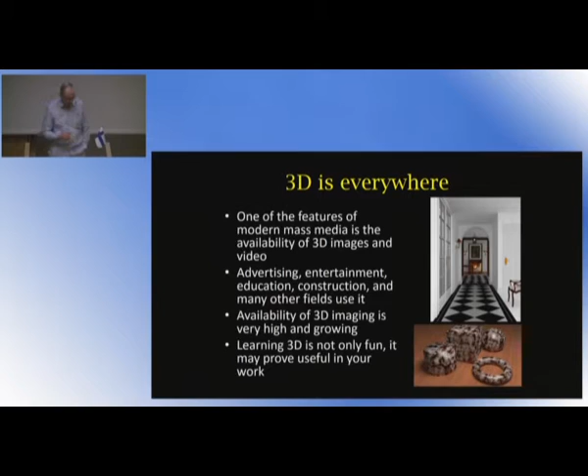The availability of 3D images is growing, and the availability of software with which you can make 3D is growing. So to make something you need a 3D environment, and if you want to go with the Autodesk products, currently you can get them for free for the duration of your studies through Haaga-Helia. But after that, it's going to cost you 1,600 euros per seat per year. Of course, if you are working someplace, it's not a big deal, but for your personal use, it's going to be pretty heavy. The same goes for Maya, Cinema 4D, and Lightwave.

Cinema 4D, by the way, is used mostly in media and advertising because it's very fast, very easy to create all kinds of 3D things there. So the basic problem is that they all cost money, unless you happen to have a student license. Well, why pay when you don't have to?

Because Blender is free, it's open source, and it's just as powerful as all the others. You can go to Blender.org now, get it downloaded, and start right away. There's hundreds of thousands of people in Blender Space, which is the virtual environment where Blender people go. They're called Blender heads, and it's a fun place compared to meatspace, which is where we now are.

It used to be a competitive package for Autodesk, but then they found that they really can't compete - Autodesk is too big. So they went to the web and asked for some money. They got $100,000 in 7 weeks, and then they gave the software to the Blender organization, or the foundation actually. That's why we have a foundation that runs the development.

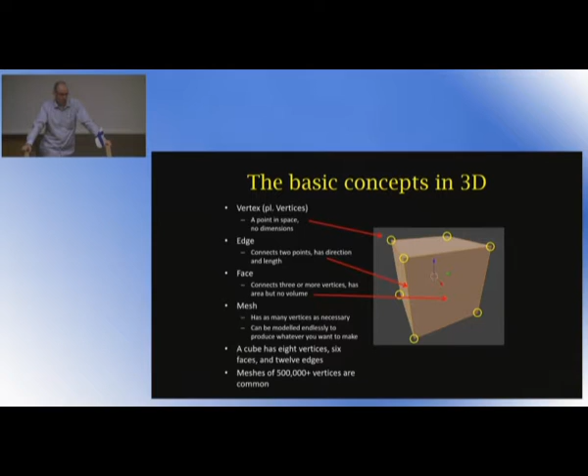You can download the models and meshes and start working on this if you want to, because it's all open source. But I'll show you a video that shows a cube, deletes almost everything so just one vertex is left, and then gives you the rest of the cube back from there, because you can do this very easily.

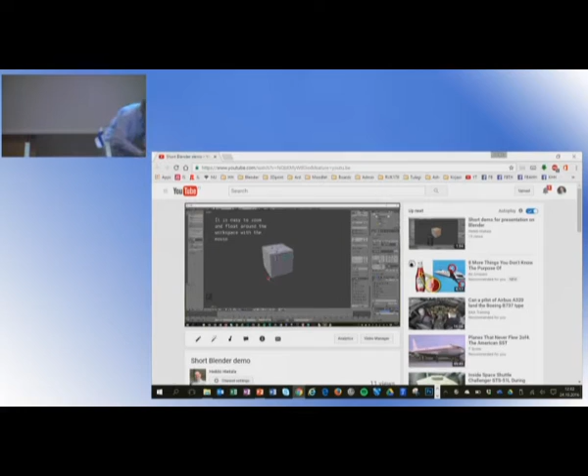So this is the Blender workspace. When you open Blender, you always get this. There's a few standard items in it. Why can't I see that? No, it should show. Okay, let's go back and start from here.

Okay, now it works. So you have a lamp, you have a camera, and you have a basic cube mesh, and you also have a grid that you cannot touch, but it's there for your placement of things, for example.

When you press the scroll button, you can orbit, pan, and move the view, and then you can select this object by right-clicking on it and go into edit mode. Now in edit mode, you can touch any of the vertices or edges, and you can delete any of the edges or faces, whatever you want to do.

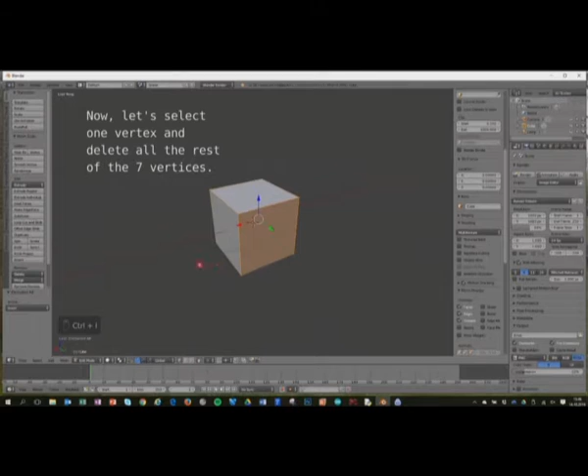So we're going to go back into vertex mode and select one out of the 8 vertices and delete the others. So what you have now is one single point in space that doesn't have anything to it except the location where it is.

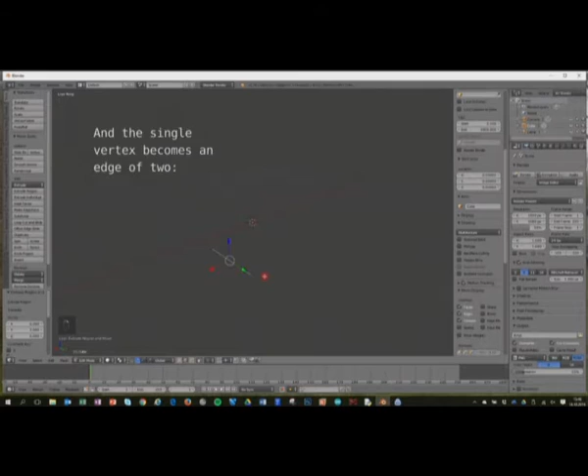And now we will press the E key and extrude. Essentially it makes a copy of that one vertex, and you get 2 vertices, and then you have an edge. Then you can select the edge and extrude along the other axis, and hey presto, you have 4 vertices and a face. Then you can select the face and extrude up, and you have the same cube that you started with. Just 3 moves.

And this is the very basic operation in Blender. All you do is touch the vertices, arrange them in the way you want to have them, move them anywhere you want to have them, and there's nothing to it really.

So the process is always the same. First you identify what you want to make, then you think about the basic shapes that you want to use. There's about 20-25 basic shapes that you can use: the cube, the sphere, actually 2 different spheres, a cone, a circle, a plane, all that kind of stuff.

And after that you make the mesh, and then you add materials, and then you add textures, and then you add a scene, lights, whatever you want to have, and then you render the image or the movie. So I'll take you through this case example.

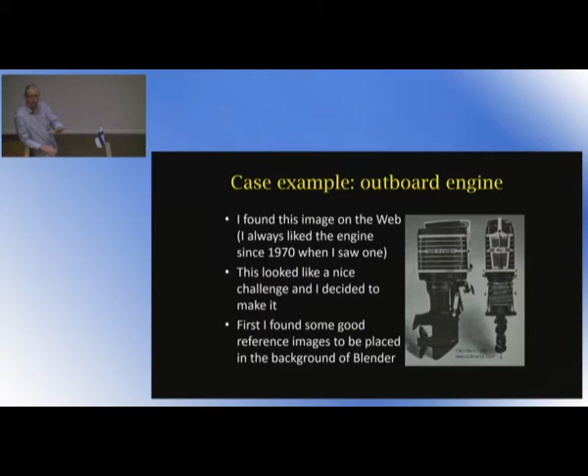So first you have to find some good reference images that you can place on the background in Blender, and then model on top of the pictures. Actually, it's very nice. So the basic shapes in here, the best basic shape is this part here.

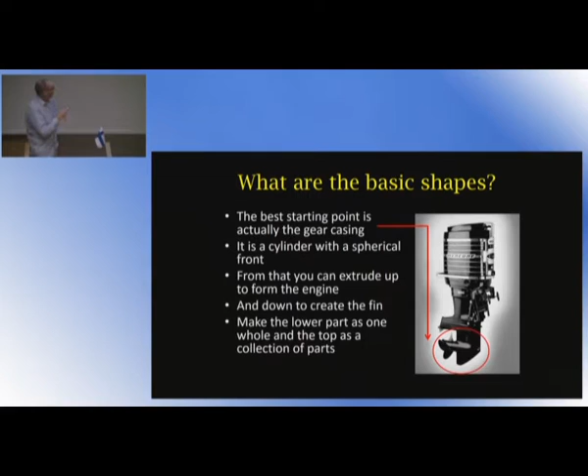This is the gear casing or the gearbox. There's half a sphere in here, and the half a sphere is continued as a cylinder. So I took a sphere, I rotated it 90 degrees, and I deleted the other half. And as you saw with the extrusion, the E key, if you have a circle and you extrude, you get a cylinder. So half a dome here, extruded out as a cylinder.

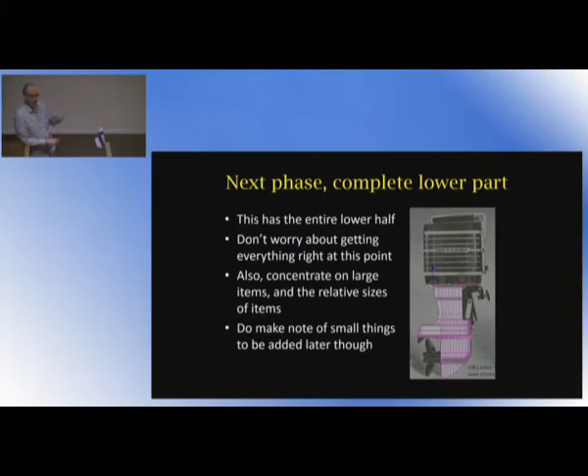Then I took some faces up here and extruded up. Then extrude sideways, up and inwards to get the cavitation plate. The first part is actually something like 3 minutes, and that's the lower half of the engine, all done. All you have to do is look at the picture and extrude and scale, extrude and scale, extrude and scale.

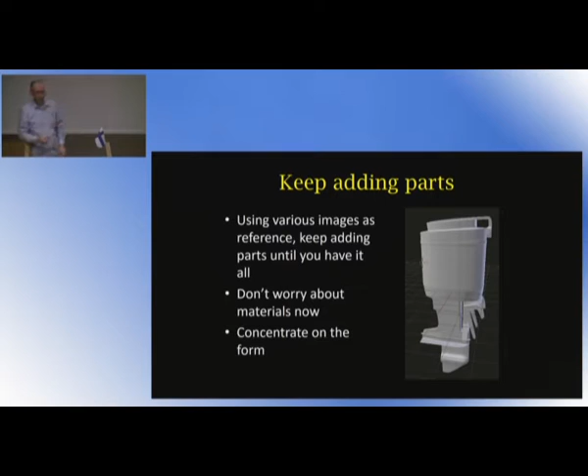And this is the engine when it's done without any materials. It looks pretty boring, but it looks exactly like the image. It's been modeled on top of the image, and it is a very close match to the images that I had. So let's look at the materials.

Most of the engine is actually semi-glossy black. In Blender you can have colors that are glossy or diffuse and matte. If you made it fully glossy black, it would not show at all because it would reflect all the light it gets. And if you make it fully diffuse black, it won't show at all either because it takes in all the light and disappears. So this is about 70% glossy and 30% matte.

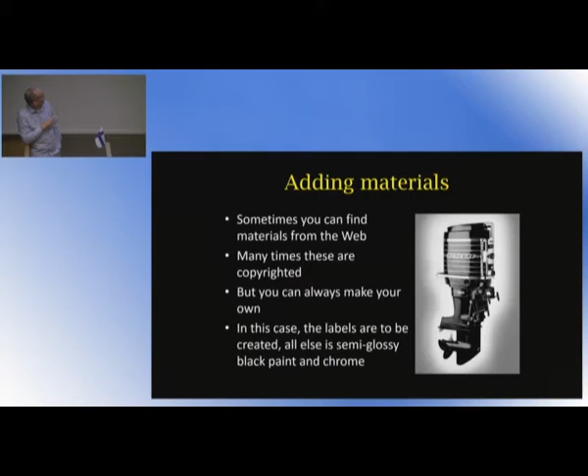Then there's a couple of decals, one here, one there, and one here, and those have to be made by hand. So I went to the web and found this image, and I called the firm that makes those. I said, can I have that in a high resolution picture? And they asked me why. I said, I'm making a 3D model of the engine. And they said, we'll call you back. They never did.

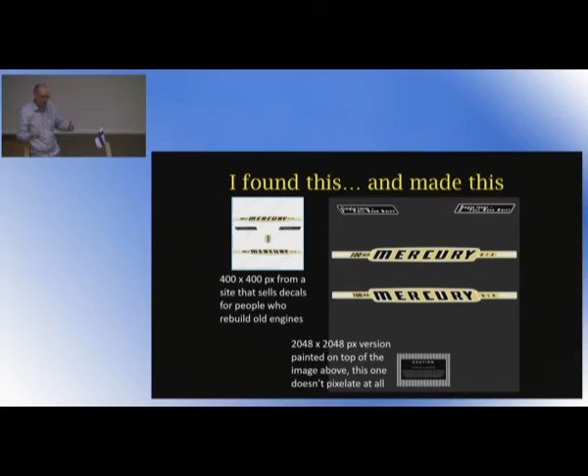So I took the picture and expanded it to 2048, and then I drew on top of that. I found a font that was pretty close to the original, and then I used GIMP to make it nice. Because when using these decals, if you didn't do that, you'd see pixelation all over the place, since everything would have to be stretched to fit the mesh. But with the materials, this becomes this.

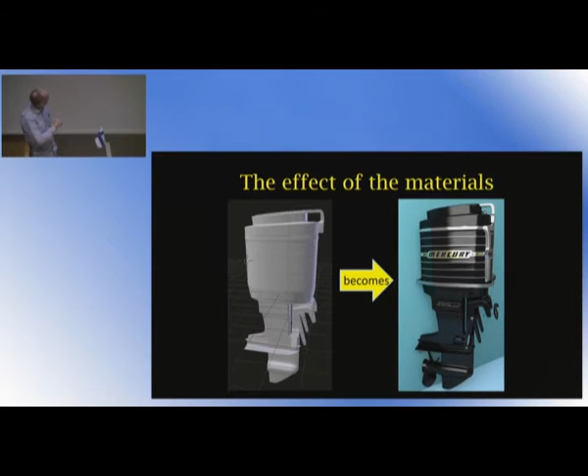So you see we're pretty close to where we wanted to go. All you have to do is identify the place where the decals go - 1, 2, 3, 4, 5 in here - and then just place the decals there, and everything else is just semi-glossy black. Then you have semi-glossy steel and semi-glossy aluminum up here, and it's getting pretty close to what I wanted to have.

But with the big picture, there's no pixelation. You can actually zoom in as close as you want to. The faceplate is made in Excel, because Excel is very good for making grids of things. And in Blender you can tell that if something is black, make it look like it's a few millimeters in, and if it's white, pull it out a little.

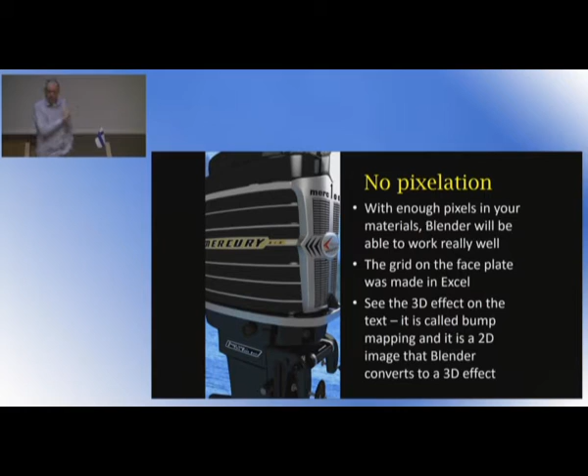That's why you could do that. This is actually a flat plane, but it has this bump map on it, and that gives it the 3D look. So you fake as much as you possibly can. Nobody's going to come and check if this is watertight. It isn't watertight, but it doesn't have to be. It looks nice - that's the point in 3D.

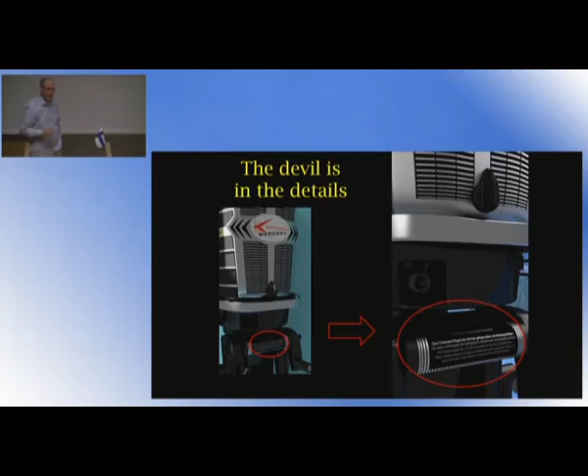But by this time, I was so hungry for more that I wanted to add a scene. In the scene, I wanted to have a boat and a lake and a pier and whatever I wanted to have. This time, I didn't want to make the boat into a very detailed, high-tech type of thing. I wanted to have a boat that looks like a boat. So I found a boat on the web, and then I made a boat that looks close enough to the real boat.

And then we have a modifier called the ocean modifier, where you can say that the wind comes from that direction at 4 meters per second. There are no white caps, but it has been going on for a while, so you have the swells, right? So you just let the animation run until it looks nice, and then you grab the picture.

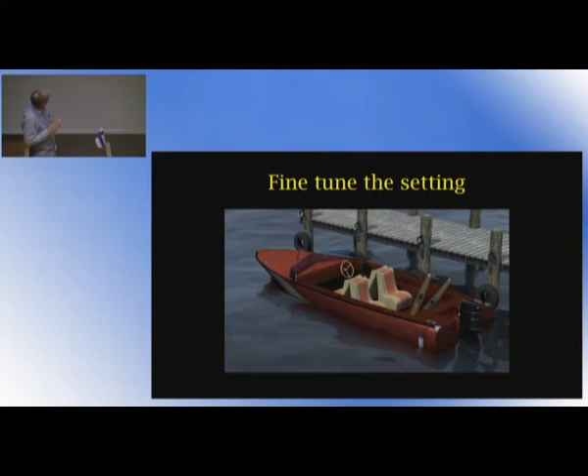Okay, then you fine-tune the setting. You make the water skis, you make the fender, you make the car tires for these thingies. You add these iron rings for the ropes, whatever. Then you make the Acme Cola cans. I didn't want to make it Coke because I don't want to get sued. So it's Acme Ski and Acme Cola. And the boat is Speedster 19.

I showed this picture to a friend of mine from my phone, and he's very big into boats. He was like, I don't know that type. Is that a Marino? I said, no, it's not really a Marino.

But yeah, there's no end to what you can do. Once you get to the scene place, you can just keep going.

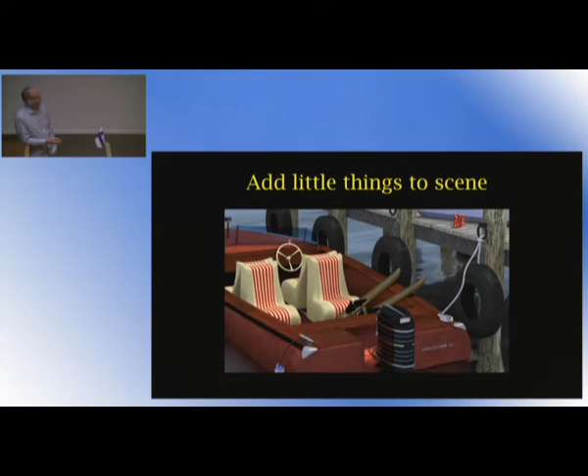So this is the final image I wanted to render, because this one has the sun over there. You can actually tell Blender how your mesh is located, where on Earth it's located, and what time it is, and then it will calculate the location of the sun. So if you wanted to have this in a Florida setting, you could easily make it by setting the sun using the coordinate system.

Okay, so this is the final render I made, but it's not the end of the story.

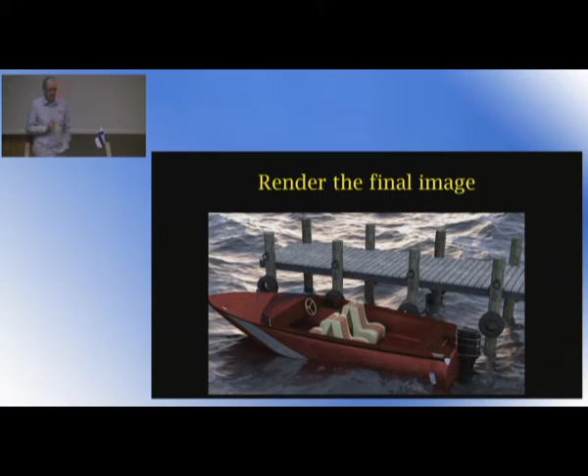Now, of course, because this is a test, like a proof of concept type of thing, they are going all over the place. But if I placed these emitters close to the engine and had the boat here, I could pretty easily simulate how it would look if the boat came from the left and passed you over to the right, throwing these small spheres.

So yeah, now it's animated. If you wanted to make a game out of this somehow, well, the mesh is there. You can start doing whatever you want with it. So this is the fun part of Blender. You're never out of things to do.

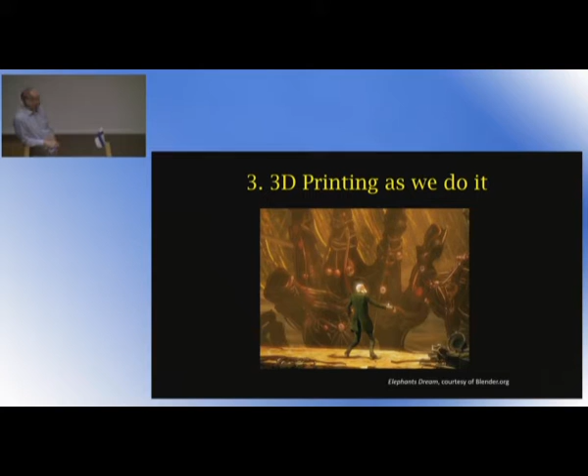This is from Elephants Dream. It's actually a nice movie as well. You should go and see it as well.

So, 3D printing is also known as additive manufacturing, and the difference between the old way and the new way is that you had to guess that this piece of rock has Julius Caesar in it, and then you would have to spend 6 years with the hammer to get this guy out of the rock. Well, I don't have 6 years, and I most definitely don't want to do that. So what I do is I print things. I only add material where I need material.

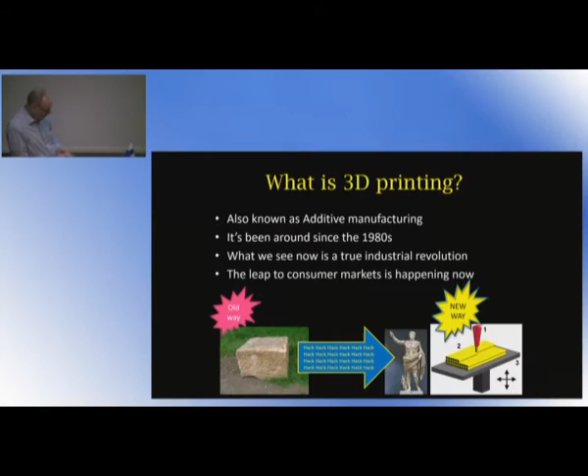So I'm trying to make it sound as easy as 1, 2, 3 because it is actually as easy as 1, 2, 3. Once you understand how to make meshes, once you understand modeling, the moving from modeling to printing is actually a no-brainer, because all you have to do is create your meshes in a certain way so that they are not too big and they don't have angles in excess of 60 degrees from the vertical, or actually 45 degrees from the vertical, because here you need supports.

And here you cannot fake anymore. Your meshes have to be watertight. If they're not, Blender will tell you and you'll spend hours finding the fault.

Once you have the object, you can export to STL file format, check the file for holes, then fire up the printer and use the printer software to actually do the printing. The design can be done in any software, as they all export STL. All you have to consider is the size.

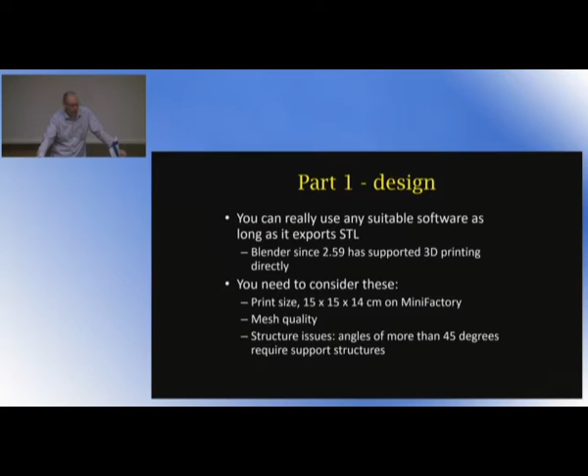My printers are small, 15 by 15 by 14 centimeters, and I have one that does 15 by 23 centimeters. But if things go right, I will have 8 printers by the end of the year, and I will have 24 seats on the printing course. If not, I'll only have 15 seats, so it's going to be a large competition to see who gets in.

The STL file, Blender files don't print. You have to export from Blender into STL. STLs are basically triangles on triangles on triangles. If you think about 3D printing as a whole, you are doing 2D printing many, many times in the same place, and that's how you get the third layer, the third dimension.

So if you were doing a hollow cylinder, you would be printing those triangles, then moving the print head 0.1 or 0.2 millimeters and printing again in the same place, then moving the print head up and printing again. That's why it takes so long.

If you look at the chess table that we have over there, the table itself takes about 16 hours to print, and the two sets of pieces is also 16 hours. So it's 32 hours to make one table. This is not for those who are in a hurry, really.

So the printing, this is the cool part. Let's say you make something that looks nice, and it prints nice on our small printers. That same STL file can be printed into any material available on the planet without any further modification, using any other printer. So Kalevala Koru enables you to send them the STL file of jewelry, for example. They will print you the piece of jewelry you want and charge you the price of the material plus 20%. I've seen some really cool, unique jewelry.

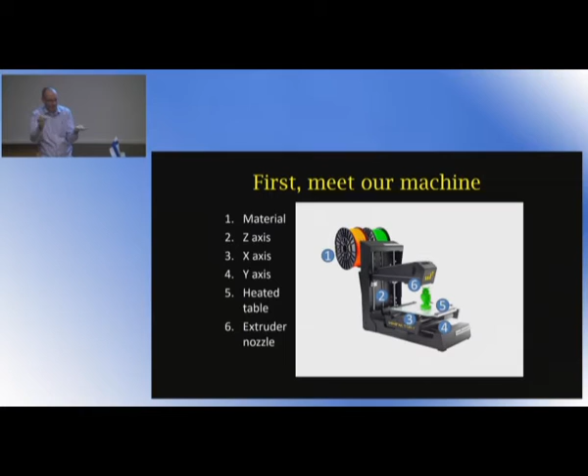So if I wanted to make a keychain from the Blender logo, I would have to find out what is the basic shape to start from. The basic thing to start is a sphere, which you cut, then extrude sideways, up, sideways, down, and then add a face at the bottom. Then this is actually the hardest thing to make, the hole. Holes are harder to make than things that are real.

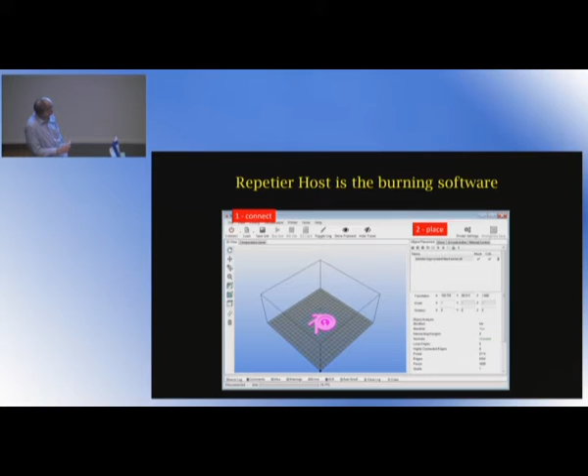You place the thing in here, then you can scale it, rotate it, move it, and check that it's manifold. Manifold here means watertight, and you can check it here. Then you can use the slicer to give you the sliced version, the G code, and check that all of these are in place.

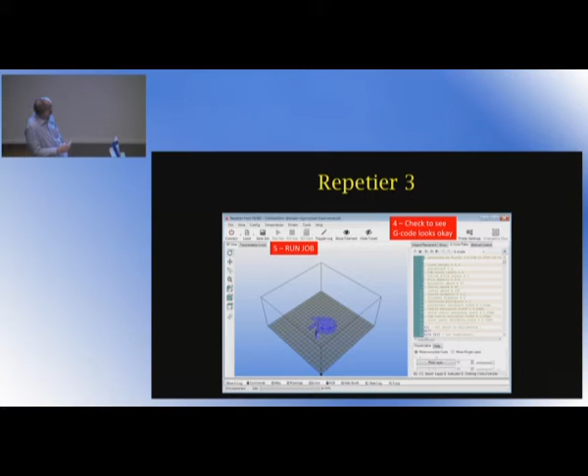And then all you have to do is hit print. This is the G code, by the way — G21 sets units to millimeters. If you were really hardcore, you could actually write the G code yourself and print something from it. But it would be very hard, because even this thing here is going to take 25 minutes, and it's something like 18,000 movements on the table and the print head. So you'd be writing 18,000 lines of code by hand. It would be nice to see if somebody did it.

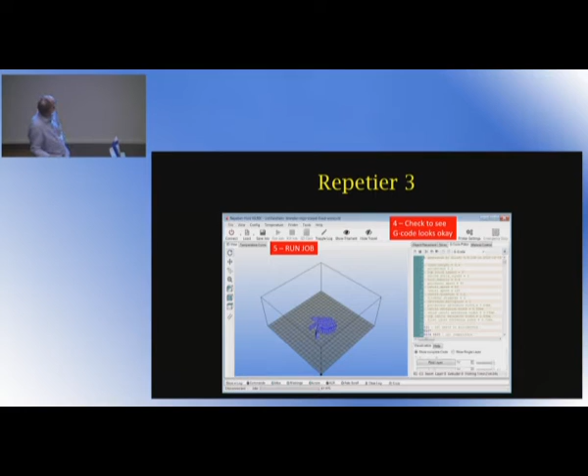And then you hit print, and hey presto, here we go.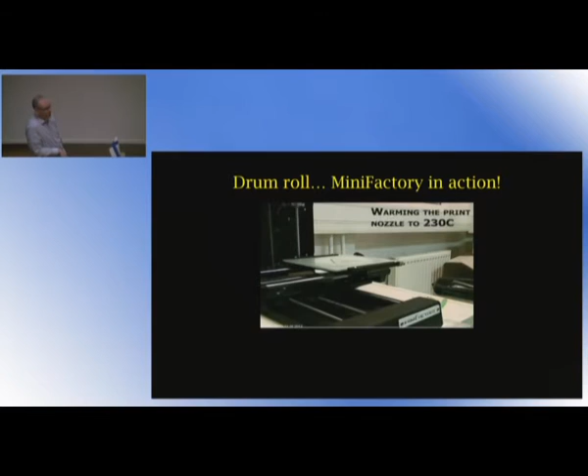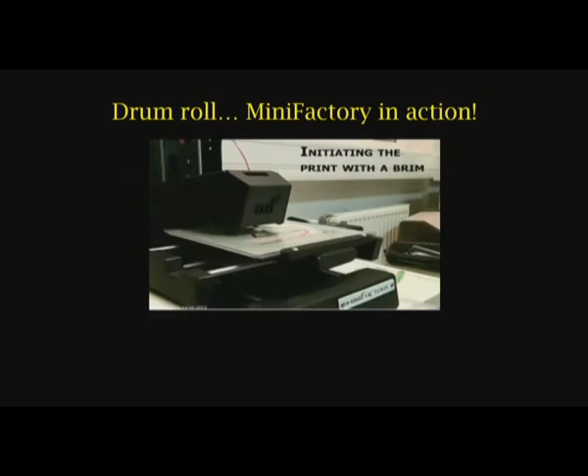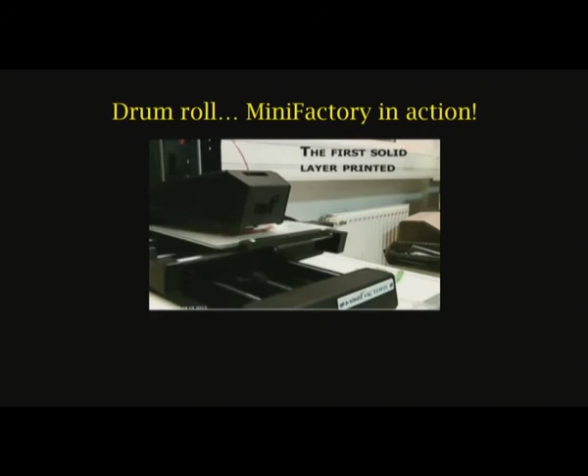First we heat the print bed to about 110 degrees if we are using ABS. Then we heat the print nozzle to 230, 235, 245, and then it goes on. The first thing it does is initiate with the brim, and the brim is there merely to make sure it sticks to the table. Then it makes the first solid layers — three solid layers first — and then it starts to use infill.

Infill is just a way of saving material. Instead of printing solid blocks, it will use 20%, creating a network of lines inside the piece that's 20% of the weight of the actual material if it was solid. But even if you print something like this — yeah, I know, nothing else will happen during the movie —

Even if you printed a solid piece or a 20% infill piece, you cannot break it in your hands if it's a 20% piece. It's so tough.

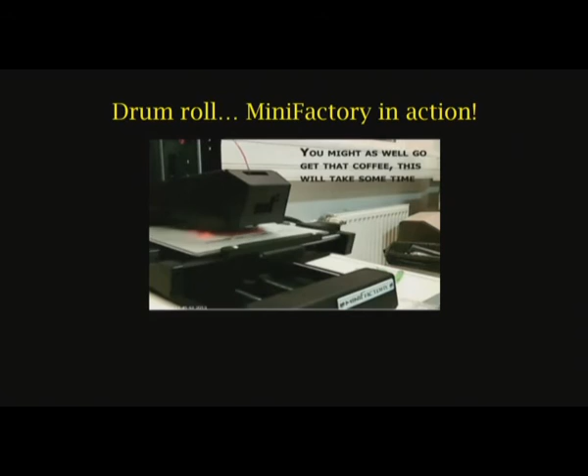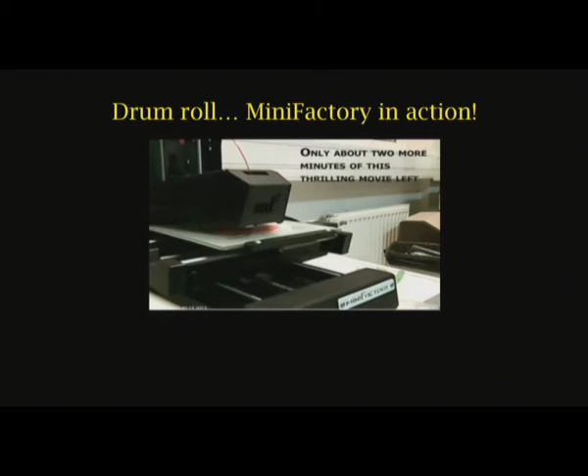It actually has an Arduino in the back. This is actually the project of a guy called Janne Pihlajaniemi at the Seinäjoki Polytechnic. He made this as his thesis, then walked across the street to the government office and said, I have one of these, would you like to give me a government grant so I can start a firm? And they wrote the check right away. Now he's selling about 1,000 a year.

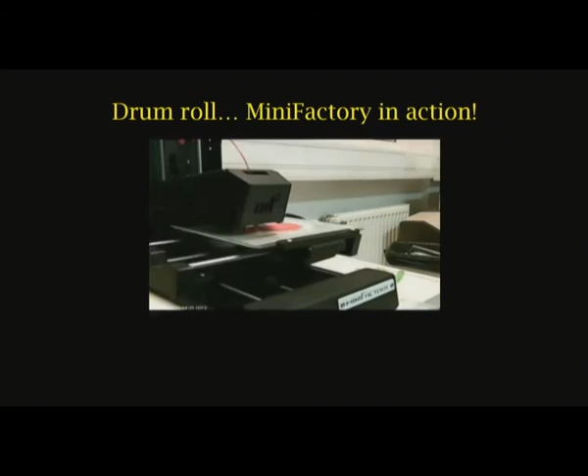And they have a new machine out — it's called the, what was it called? No, well, anyway, it's big, like 30 by 30 by 40. Of course, the print time is about 60 hours, but who cares? So yeah, that's what happens. And this is the same thing, but in real time.

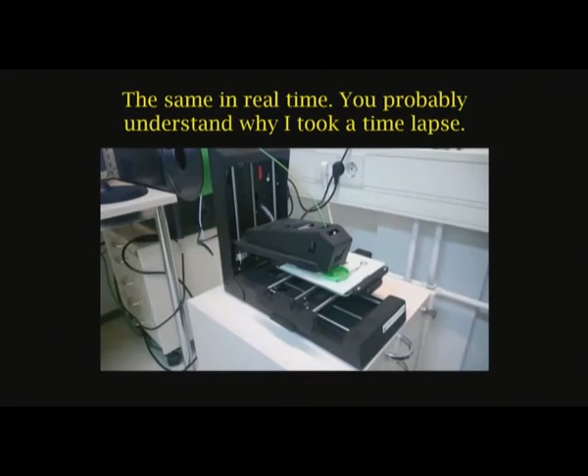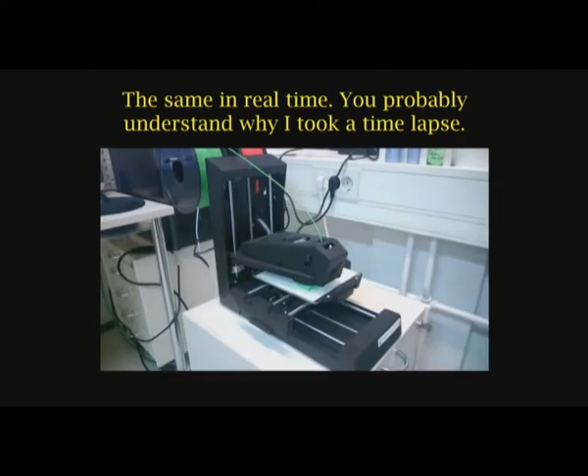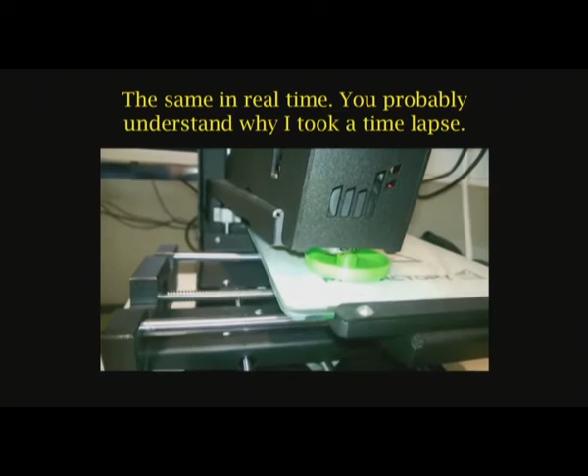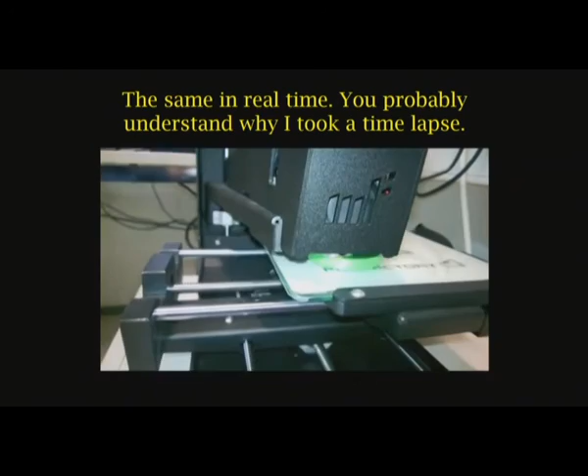So you understand why I made a time lapse. It's actually not the same piece — this is a headphone container or headphone box. But you get the point of how it works: it moves the table and adds molten ABS to the thing. This one is nice in the sense that it has a bolt, and on the lid you have a screw, so you can screw it on — it's very nice.

Any questions on printing as how we do it? Because now we go on to printing, how they do it.

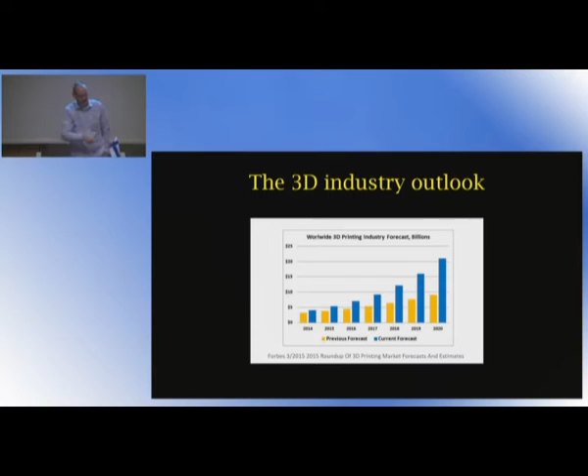This is why I actually wanted you guys in here. Because Forbes magazine in 2013, see the yellow bars? In 2013 they thought that we would have 3, 4, 5, 6, 7, 9 billion per year. Only one year later, they came out with the blue bars, where we have 20 plus instead of 9 plus billion per year. And this is an estimate. The last estimate I've heard for 2020 is actually in the region of 40 billion by far already. So this is one of those industries where it's going like the hockey stick thingy they are using also for climate change and other stuff.

So let's look at who's in the business. Well, GE and Boeing, Ford, Nike, Hasbro, and then a bunch of startups like Hewlett-Packard, Amazon, Pratt & Whitney. These are serious players, folks.

Well, just look at what Boeing is doing. 20,000 different 3D printed parts for 10 types of airplanes. And all of these parts are man-rated. Man-rated means that they can be installed in a plane that is actually flown by people or has people on it when it flies. They're not drones like Reapers. They're actual planes.

What are they doing? Of course, prototyping, sure. Product development, yeah. Innovation, 10 or 11% of all the effort that goes into 3D printing is in innovation, to make things that are impossible using traditional methods. Because with 3D printing, you can actually make pieces that you cannot make by milling or drilling a piece of metal. You can make things that cannot be made in any other way.

Also, improved or expanded product line. See this, 8% customized products. I'll give you just one example, from Hasbro, who make kids' toys. They are going to come out with games where you have the pieces that you play with. When you get to a certain level in the game, you will be sent an STL file, and you can print the new character for the game, and you will have superpowers in that game. And you can send it as a gift to your friend if they have a birthday party. You can send the STL to them, and they can print their own. Next time you play, you'll have superpowers. So this is just one example of what you can do with these things.

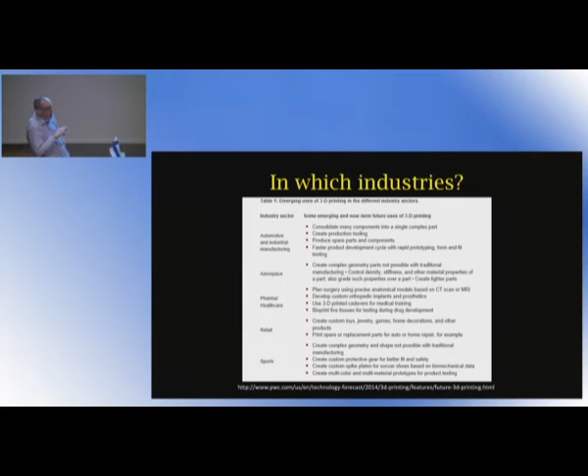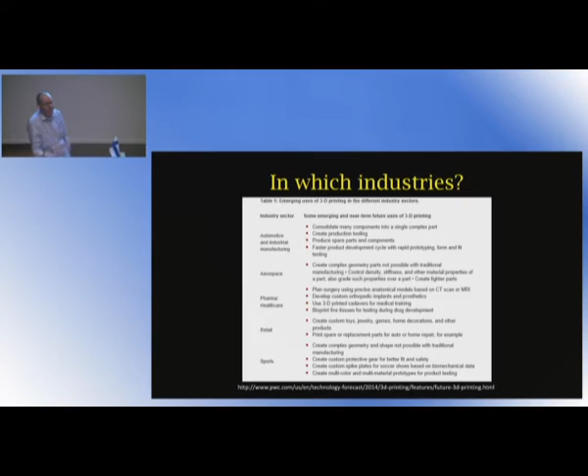Automotive and industrial manufacturing, cool. Aerospace, yeah. Pharma, healthcare, sure. Retail and sports. So what's out of these? Not much. 3D can be used in all of these sectors, which covers probably 95% of all industrial production.

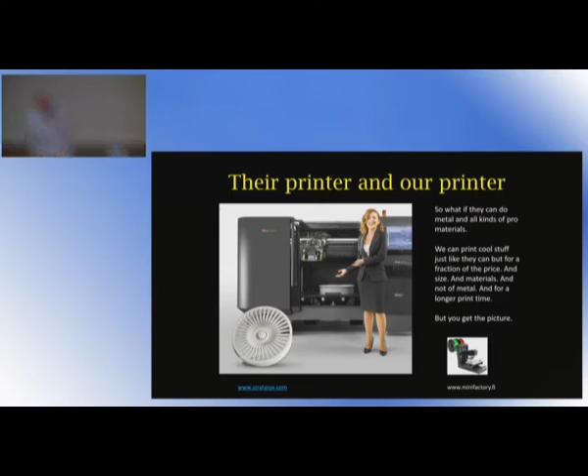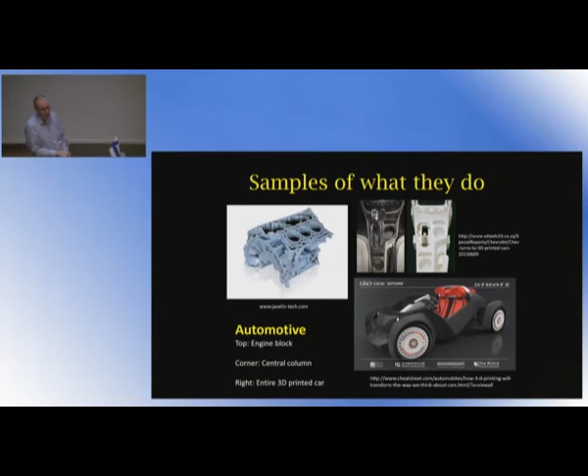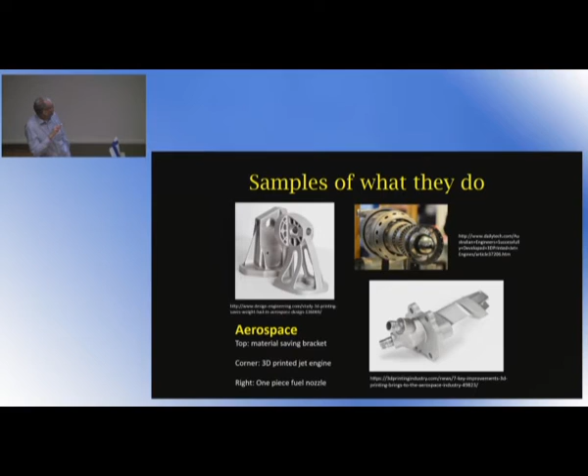1%, this is a fuel nozzle. It's all printed in one piece. This fuel nozzle alone saves 1% of the fuel costs on a certain type of General Electric jet engine. Since they fly almost 24/7, it's going to save a lot of fuel once they install these everywhere. This is another good example, because you can have channels inside here that cannot be milled. Inside there, you have channels that have optimized the fuel flow, and that's why it saves the 1%, and that's why the whole thing works better.

This is a 3D printed jet engine that can actually make like 33,000 revolutions per minute. You can put this on a drone and fly it off the ground. It's all 3D printed - all you have to do is dust it off and assemble it.

And some of these are actually printed with materials that will allow bone to grow on it, and when the bone is there, it will degrade away. So he will be left with just bone in the head, but it will be exactly the same as the other half.

They are also printing bodies for students, because not enough people leave their bodies to science, so they are 3D printing bodies for students to operate on.

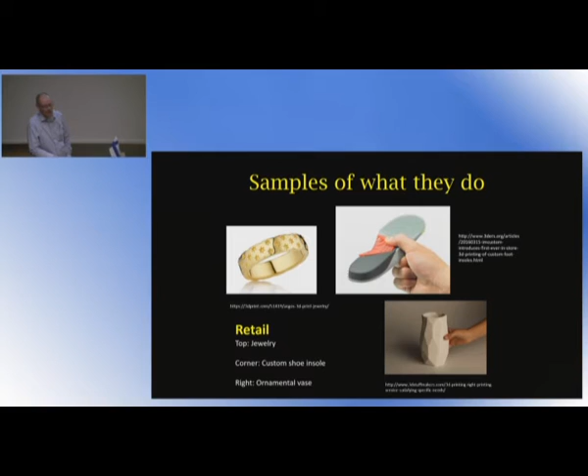So people have asked me, isn't this going to lead into a situation where everybody is printing stuff all the time and then it's not going to be very ecological? But I've always told them that I've never printed anything I didn't need, but I've printed many things that I couldn't buy. So it's not going to be printing for waste, it's going to be printing exactly for the need, and that's why it's going to be ecological.

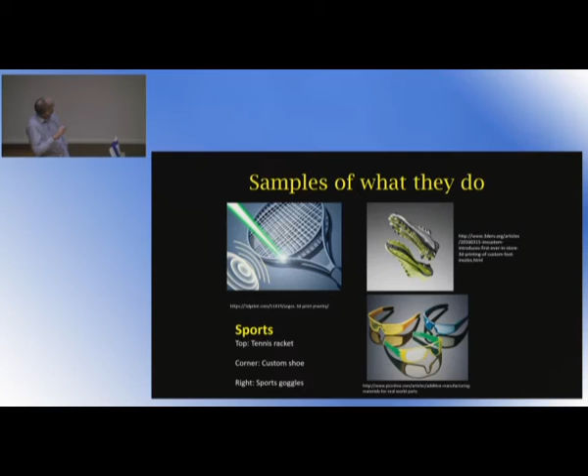This is a 3D printed tennis racket, and then these are the footwear, and then we have these - first you let them scan your head and then they print you the frame. And in Kuopio they have managed to print even the opticals. Pretty cool.

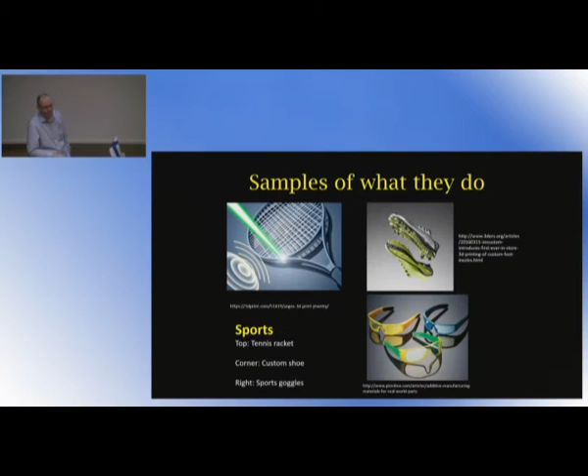I am not going to go into construction or augmented reality or virtual reality because we don't have time. But one last word on manufacturing.

Hewlett-Packard is coming out with a new type of printer. It's about 100 times faster than our printers, which means the print time that took me 45 minutes is going to be like 2 minutes. With that thing, if you have a manufacturing run that is less than 55,000 pieces, it's actually cheaper to print than manufacture by traditional methods. And half of the printer is already printed. 55,000 pieces is already a huge manufacturing run, but if you don't have to make all the dies used for traditional manufacturing, you're going to save a lot of money.

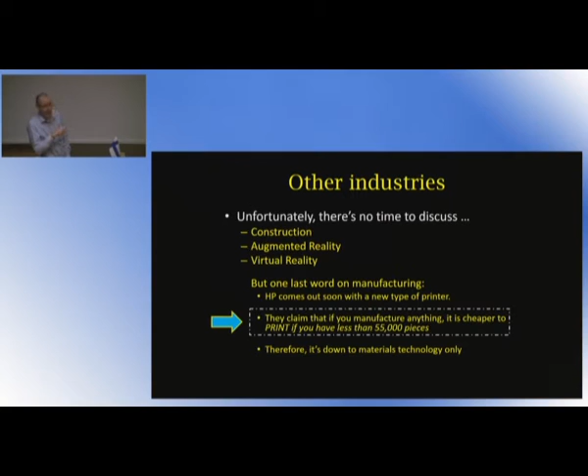Only 1 in 3 is not doing anything at the moment. That means you stand a 2 out of 3 chance to be asked the question: what do you understand about 3D when you go for your job interview? If you have to say you don't have a clue, versus saying 'I took the course, I know the basics, I can make some simple meshes, I know how to print them, I can easily grab the rest,' you stand a chance of beating the other guys who say they don't really care.

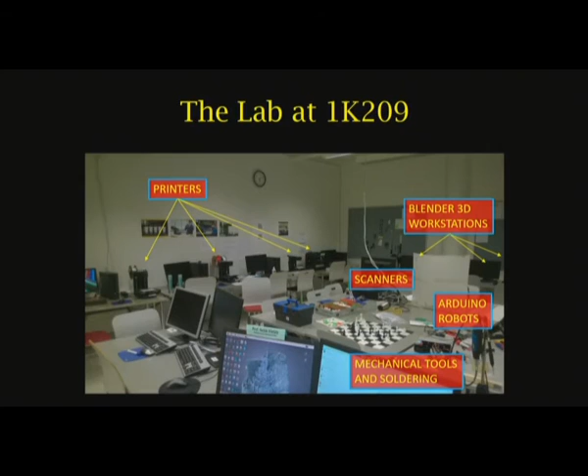So I have already run one 3D theme group for thesis work. I had about 10 people who wanted to write their thesis on 3D. One guy looked at printing methods, another wanted to compare scanner technologies. One of them took a small knight figure and passed it through the scanners into Blender and into Unity. Then there was another one who has the virtual headgear, where you can enter any building a company has designed, go into any room, and add furniture just by blinking your eye. That was one of the better theses, actually. I'm really happy to see I already have 10 people there, and happy to have even more. I'm going to start another group later in this period.

These are our 3D scanners. This one uses a high-definition webcam with a rotating table, taking about 40 pictures, then we used Autodesk Remake to turn the object into a virtual object. This one is Arduino-based, where you have the Arduino here, two lasers, and a stepper motor running the table. It's a robotized version that runs on its own.

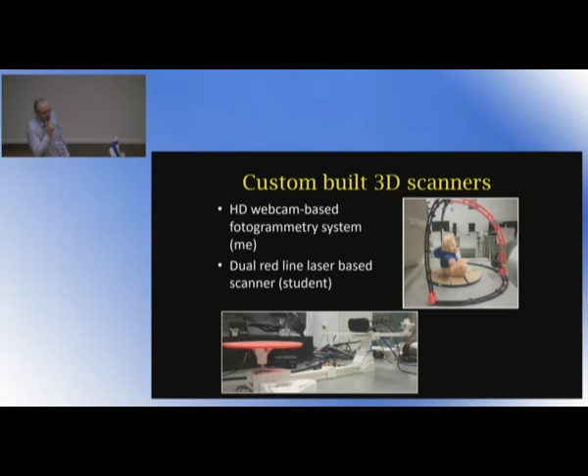So the moral of the story is this: open source has the power you need. You don't have to buy anything. You can just get open source and start doing things with it. So it's not a question of what you can do, it's a question of what you want to do.

We also need to employ the initiative of the students, and I'm trying to get a thing called 3D project into the curriculum. The 3D project would be 6 points of ECTS, and I don't know what people want to make - I just want to have the points, so when they come back and say they want to make a game, for example, we can say okay, that's a 3-point thing, or a 6-point thing. That's actually going to go through pretty soon, hopefully. I want to get into a situation where people are already doing something in 3D, and I just acknowledge that and give them ECTS for what they do, because they do the work, and I just judge what they do and see how much time they spent and what they learned.

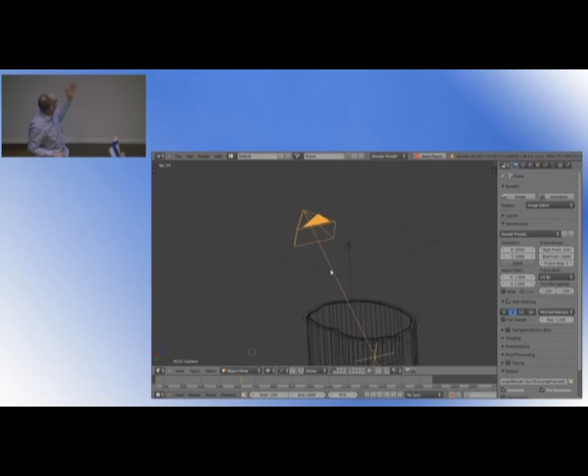I like watching Blender Guru tutorials. He makes the most tutorials, and he makes very easy tutorials. They're really easy to understand, and he explains why he does things. I don't like tutorials where it's just click here, click there, click there, click there, and hey presto, you have this. So he always explains what he's doing and why he's doing it. And oh, by the way, if we wanted to do this, then we will do this and this and this, and now that we're doing this, we go this way. So his tutorials are really high quality, because he really wants the users to understand and to learn.

Any other questions?

Well, yeah, that's how it's done, basically. Blender is tracking all those points, and once it has tracked all the points, it knows the location of the camera in relation to the ground. After that, you can start adding things into the mesh, because Blender knows where the camera is. So it's rather cool.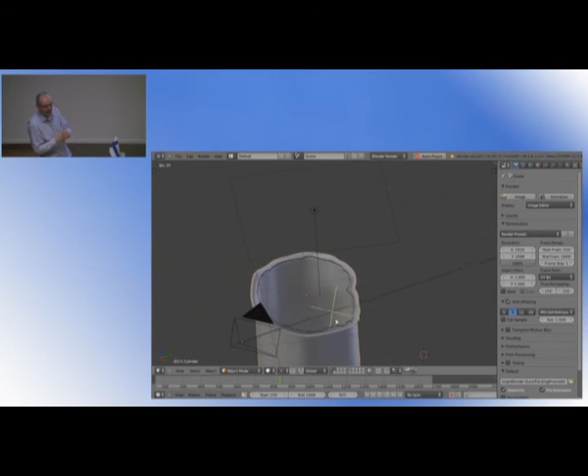When he first posted a 35-40 second piece saying, 'This is my home street in South Korea. Oh my God, there's a huge hole in the ground,' it went viral for a while. South Koreans were like, 'What is happening here?' So it's like, you shouldn't do that, it's terrible. Yes, but yes, sure.

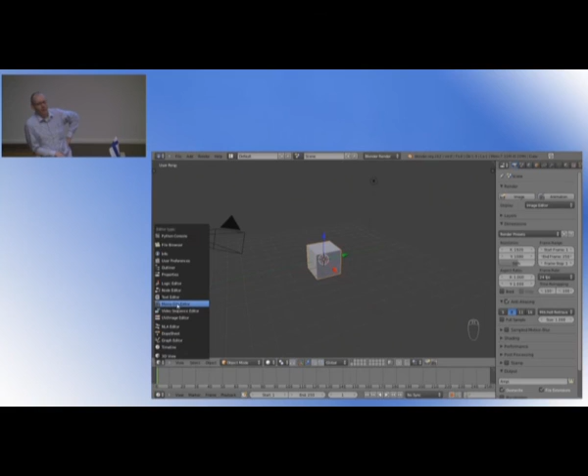My vision for 3D printing at Haaga-Helia: well, if I don't get the 500,000 plus machine, it's going to be 8 printers churning out interesting stuff for robot projects all the time, people taking their ideas and turning them into something that they need, that they want to have.

I'll show you a couple of things here really quickly. It's actually here on my channel. How can I get there? My channel. So I've been doing bits and pieces.

This is a two-way tiltable table. If you wanted to, for example, attach a webcam to that table, you can then tilt it that way and rotate it that way. Okay, this is the proof of concept thing.

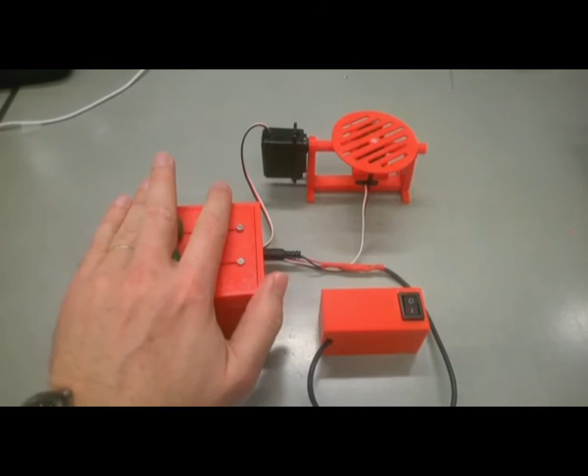These are potentiometers here, I have to manipulate them by hand. But I already have written a small Python program that enables me to use arrows. Click on an arrow and the thing will point there, and click on the other arrow and it will turn there. Okay? Now, the next thing is that I just bought, this is the Arduino, I bought an Ethernet shield for that.

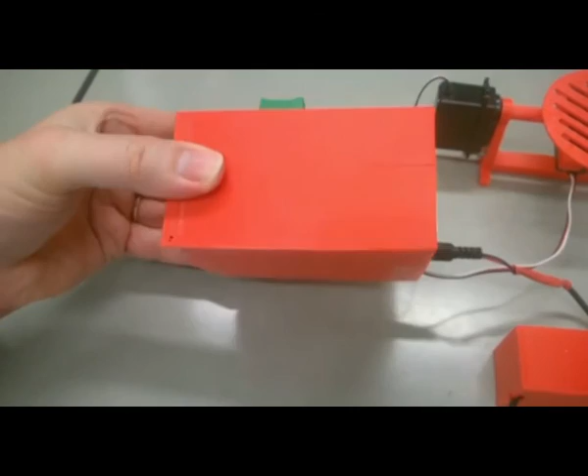So I can attach that thing into Ethernet, so I can then run it remotely. I can place it to a summer house, wherever, and look around with the webcam from there. And I also bought a camera module for the Arduino, so I don't need the webcam anymore. So there's always like the next thing. And also my wife got a new phone, and I made her give me the old phone so I can use the Bluetooth. I have a Bluetooth module for the Arduino, so I can see how things go.

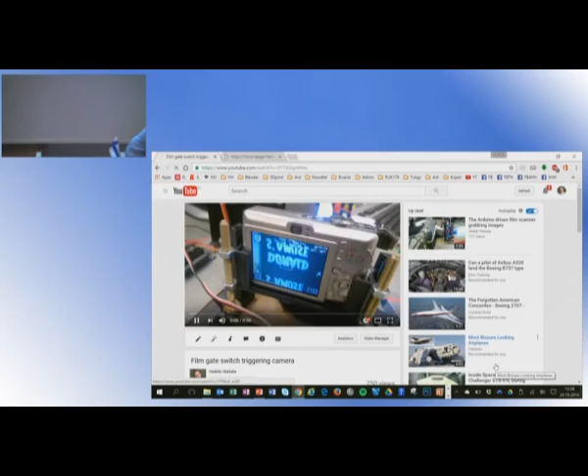And the bigger thing that I've made is a scanner for film. If you have 8mm film, you can actually scan the film using this. Sorry, just one way down. Here we go.

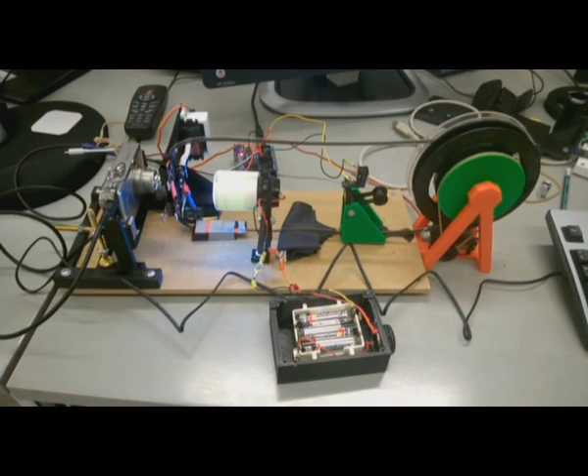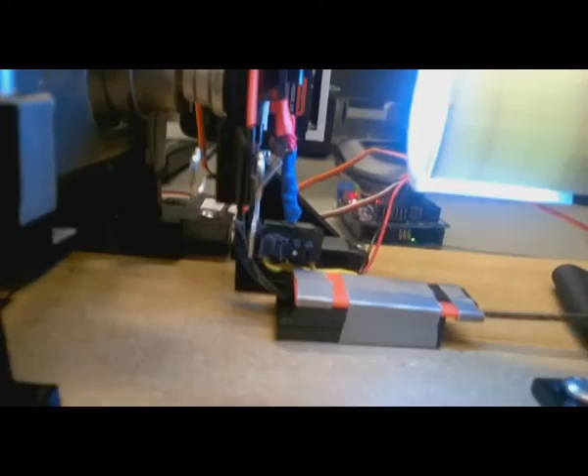So this machine has 8mm film running from here, going to the film gate, and then back to this other spool. There's a servo there, rotating that thing, and then there's a film gate. And every time this little switch is pressed, the Arduino sends 5 volts to the old camera from 2002, and it grabs a picture. In a 4-minute film, you have 3,840 frames, and this machine is able to grab them all.

It takes about 4 hours to run, but I don't have to do anything. And then I have all the images, and I can take them into Blender and make them into an AVI file. Now, did I know exactly what I was doing when I started on this project?

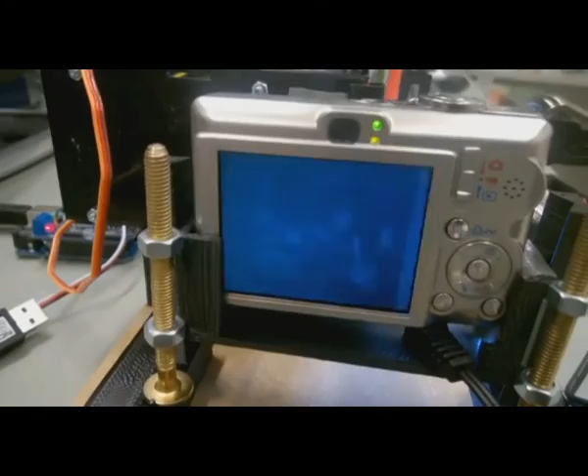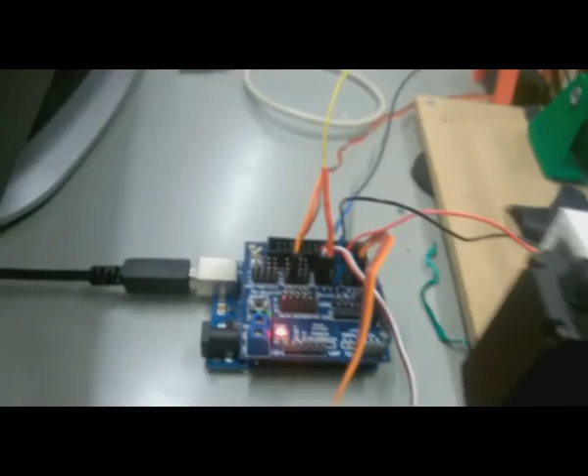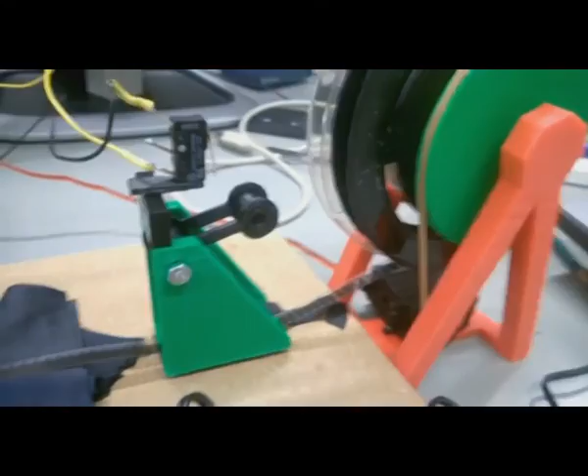I had no idea how it was going to be made, so I made it piece by piece. I tested parts, I printed things, and then finally I came up with a thing that works, like so. So this is the fun part: identifying what you need, then figuring out what you have to have in order to get what you want, and then figuring out how to make those things one by one, and then putting it all together, and then having something like this that actually works.

That's the cool part, and this is what I want to see. I want to see people with their own ideas, their own projects, so we can talk about these things and see how it goes. Any other questions?